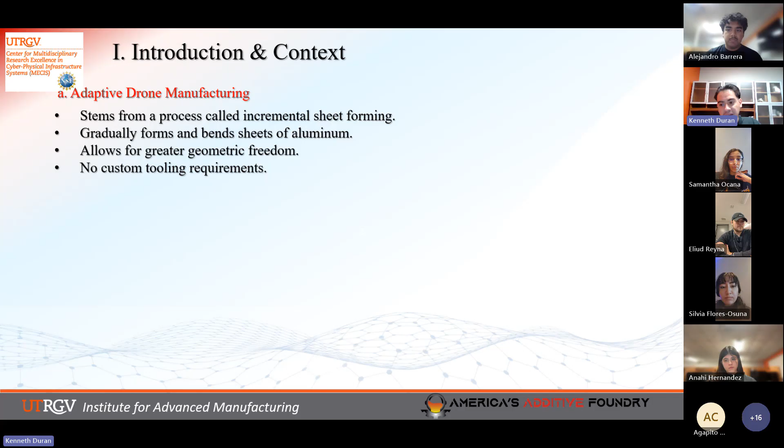So the problem statement. The problem that this research project is attempting to address is adaptive drone manufacturing. This process that I'm working on stems from a process called incremental sheet forming, which uses robotics to incrementally form sheets of metal, specifically aluminum, and now they're starting to work towards titanium. This process allows for a greater degree of geometric freedom, and it removes a great need of custom tooling requirements from the metal forming process.

This process is classified as a disruptive manufacturing technology. It aims to use artificial intelligence, adaptive manufacturing, robotics, and simulations to guide the process and disrupt the current manufacturing paradigm. It aims to do that by allowing for greater flexibility of parts, as well as allowing a manufacturer to manufacture custom parts on demand without the need for the design of tooling. Combining this new method with technology such as additive manufacturing will allow for greater possibilities.

Now on to the state-of-the-art processes that this draws inspiration from. The main process is called roboforming or incremental sheet forming. There are a couple different types. One method uses a single point, called single point incremental sheet forming, shown there on the left. You can use just a robot with a tool. Some manufacturers might have a sort of die or supports that they can adjust the height of to allow this tool to press against and generate the shape of the part they want.

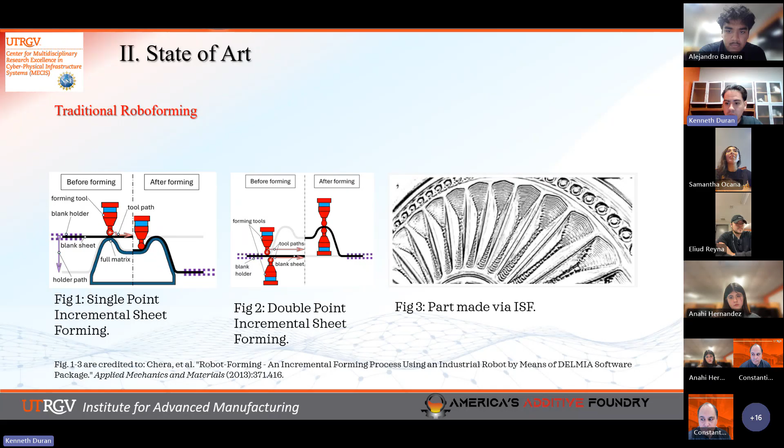The more advanced form of this is double point incremental forming, which is in the middle. Instead of having supports or some kind of a plastic insert, they'll just have two robots, one from each side of the material. One kind of pushes up as a support, and then the other acts as the workpiece. On the right-hand side, there's a close-up view of a part made by this process. You can see there's a lot of layer lines, almost like 3D printing. This part will incrementally form a part sort of like 3D printing, except it's plastically deforming the material millimeter by millimeter, one little layer at a time, giving it that rough look.

There are some limitations with these prior approaches. The first being that they are very slow - it can take hours upon hours to make a small part. They require massive robotics, very complex path planning, controls and sensors. A lot of these sensors and control systems are proprietary, and the tool coatings on the tooling used, even though minimal, are also proprietary. These parts produced tend to have very rough surface finishes and great dimensional inaccuracies. So to compensate for these inaccuracies and surface finishes, they routinely manufacture an oversized part and then cut out the desired size and finish it as needed.

The benefits to this process, as mentioned before, are the toolless manufacturing. So even though this is a bit slower, for small cycle productions, if I need something like maybe 100 parts, it might be financially beneficial to go this route instead of manufacturing custom tooling like a die or mold, which is very expensive and might take months to design and trial and error until it gets right, making certain parts prohibitively expensive to make via traditional processes.

Now, the methodology for my research project is a combination of robotics and off-the-shelf components. One key thing we aimed to do was reduce the need for custom tooling, so all of the robots and materials you can buy are common - nothing is really custom manufactured. I'm making use of an ABB IRB 6700 industrial robot, using a Loadstar pancake sensor, some aluminum extrusions, conveyor rollers, and common hardware. With the exception of the robot, everything I am currently using can be purchased off of websites like McMaster-Carr and used to construct this cell.

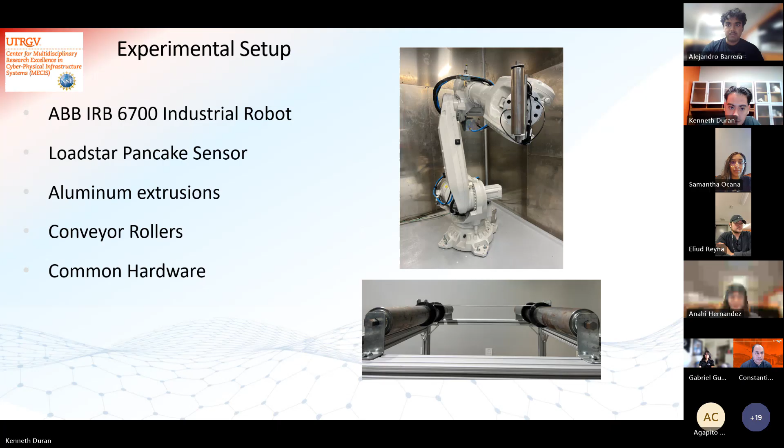Now, for our simulation setup, we're doing a simple geometry that replicates the support rollers, the sheet of metal, and then the load roller that's fixed to the robot. The LX represents the sheet metal length, LY is the thickness of the sheet metal, LZ is the width of the sheet metal, DC is the diameter of the load roller, which is on top and will be supplying the force to deform the sheet metal.

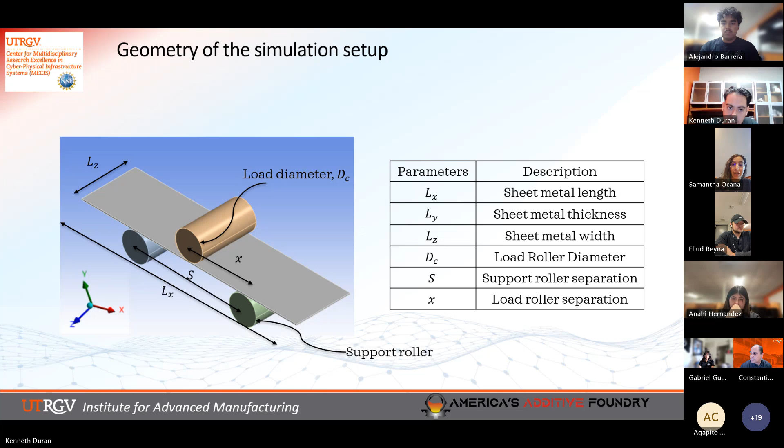S is the separation between the support rollers, and then X is the separation between the load roller and one of the support rollers. And these are the material properties. So I will be using 6061 T6 aluminum alloys, since that's very common in use for components and aerospace. Since this is for drone applications, again, I want to use common materials.

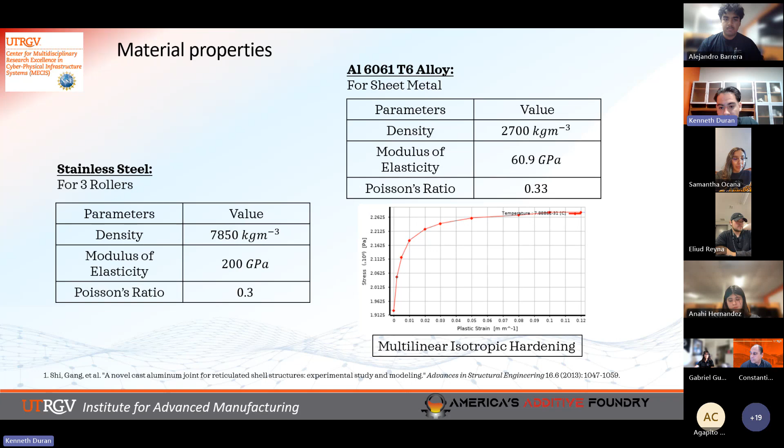I stuck with that. And then these are the properties for the stainless steel rollers I am implementing. It has to be much harder than the aluminum in order to plastically deform the aluminum without being damaged. On the bottom right is the isotropic hardening curve that I am using in ANSYS to base the deformation simulations off of. Now our applications and results.

So here I am showing simple 3-point bending, and I'm using a simulation of ANSYS, and it's going down and plastically deforming it up to 35 millimeters. And what we're showing here is the steps in this process, showing how there is some elastic recovery inside of the material. In metal forming, this is known as spring back. On the right-hand side, you'll see a mapping of the displacement for each step, and then you'll see the 3 steps on the right where it finishes its elastic recovery and stays stable in the relaxed position.

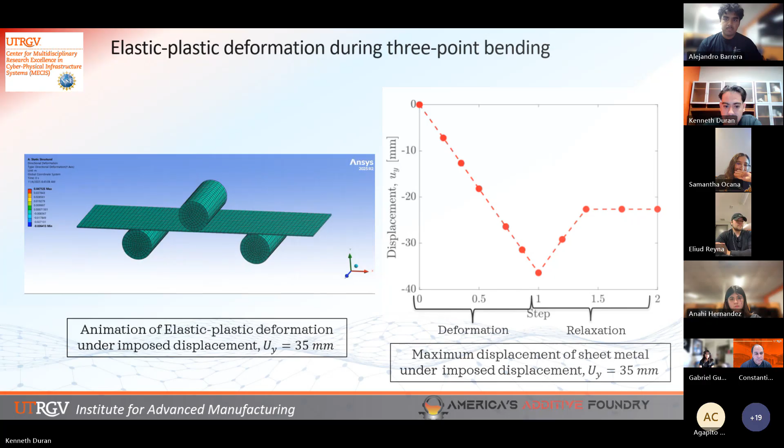Now, one thing that we would like to do in this study is leverage the use of AI. So implement some of these simulations and models to train an algorithm to help us predict metal spring back so that we can predict the pathing needed to create a final part. So here, spring back compensation is defined as delta Y. That's the difference between the displacement, the capital UY, and the relaxed displacement. So the capital UY is the displacement when this is under a load. That is when the roller is pushing down. When the roller returns, removes the load, it goes back to the relaxed configuration.

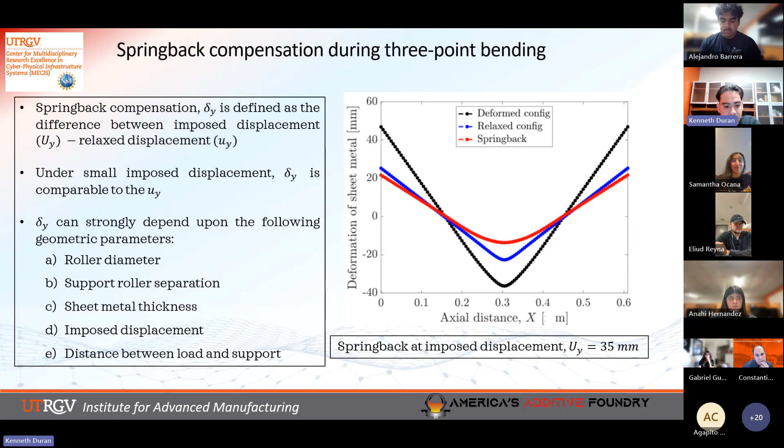On the right side, you'll see the black is a deformed, the blue is the relaxed, and then that red is the spring back. So that's the amount of elastic recovery that happens once the load is removed. And that is important in forming a part, because if I want a part to be in the shape of that blue line, I have to overbend it. So the goal of this is to use this as a baseline to train a model to tell us how much to overbend to reach the required geometry that we would like. Now, what we're finding is that this spring back can vary greatly depending on the roller diameter, the support roller separation, the thickness of our sheet metal, imposed displacements, as well as the distance between the loads and the supports.

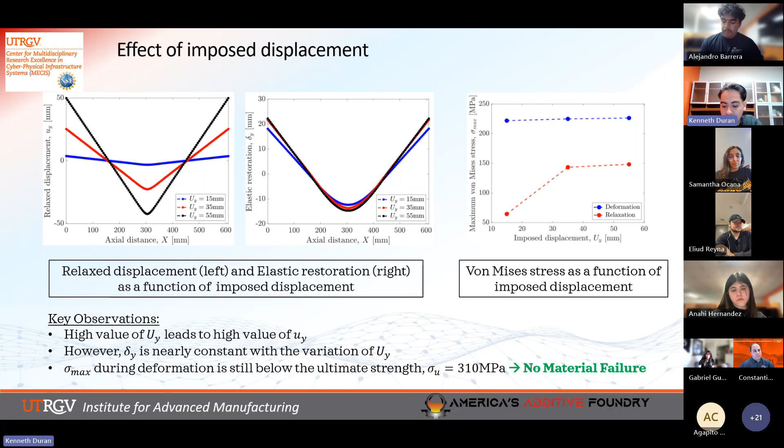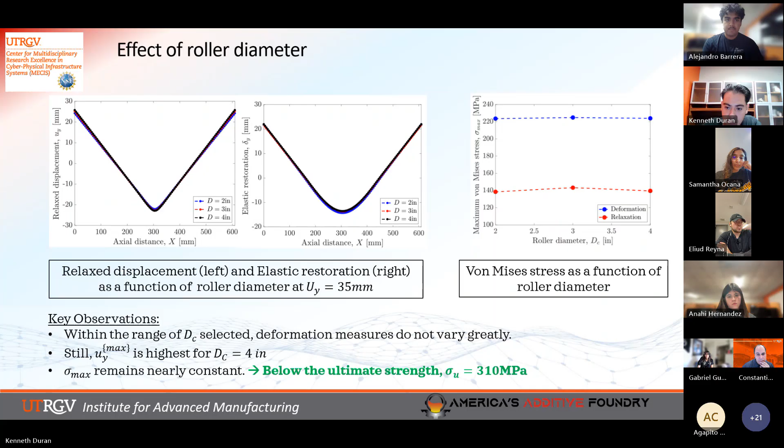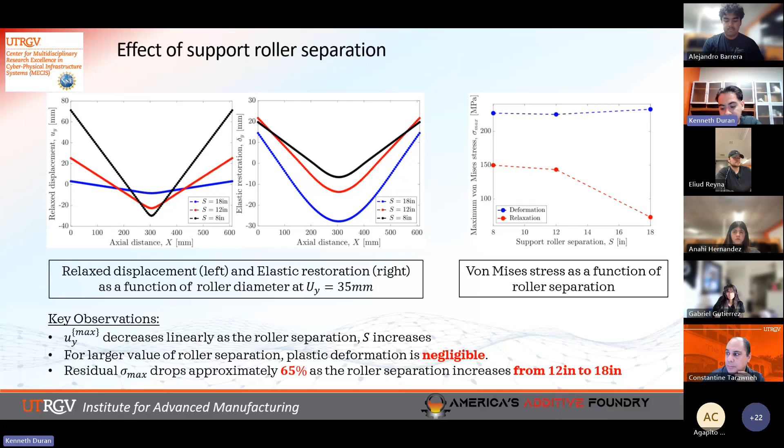Now, the maximum stress drops approximately 65% as the roller separation increases from 12 inches to 18 inches, meaning that the closer these rollers are, the greater this stress that the actual material experiences, leading to more plastic deformation.

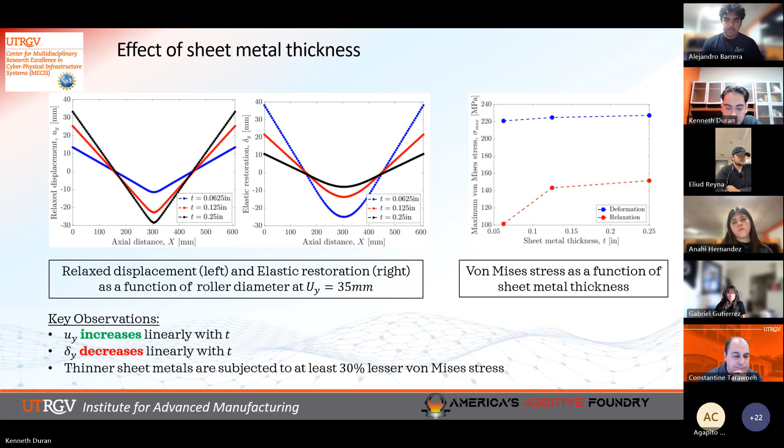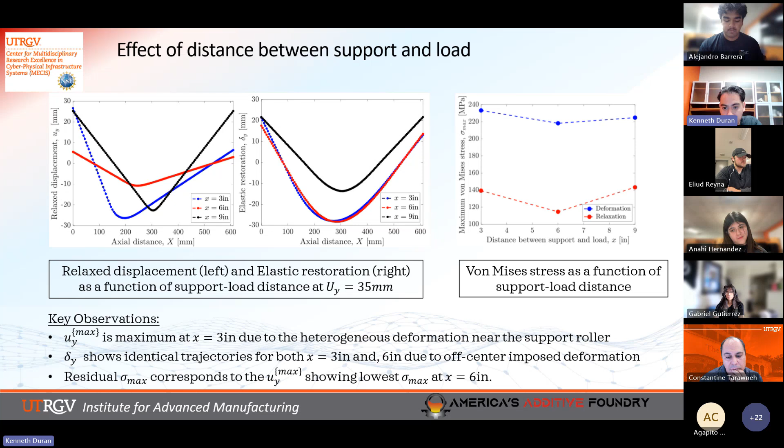The residual stress, again, here was actually lowest at X equals 6 inches, meaning 6 inches away from this support is where it was lower. Right next to it, it experienced a much greater stress.

Another thing that I've been looking into is the effects of repeated loading, meaning that if I have a displacement of 0, 45 millimeters, 50, 60, what happens if I displace it a small degree, remove the force, displace it more, remove it, and keep displacing it?

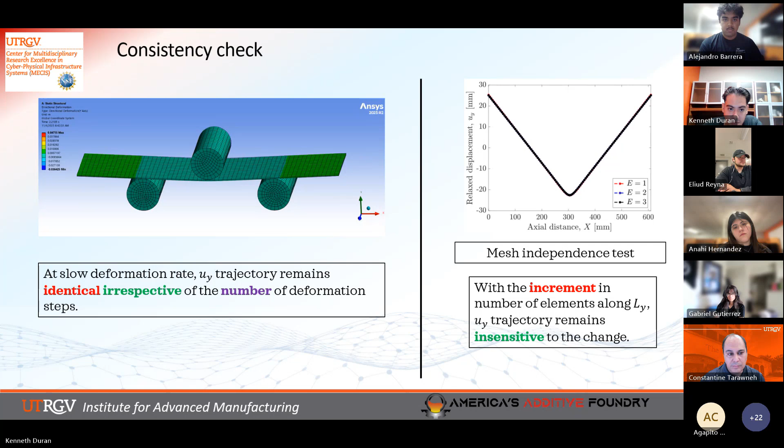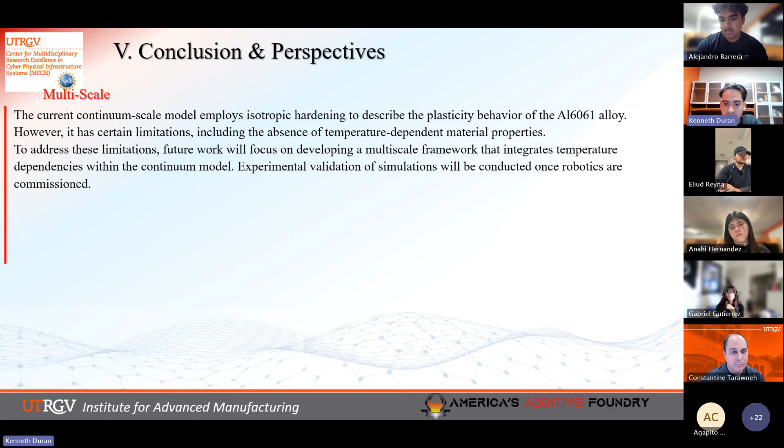I also need to complete experimental validation of these simulations once the robotics in the lab that I am using have been officially commissioned to actually go and verify that real life matches these simulations. If there's an issue or discrepancy, we can go back and forth between them until these problems have been addressed. And that concludes my presentation.

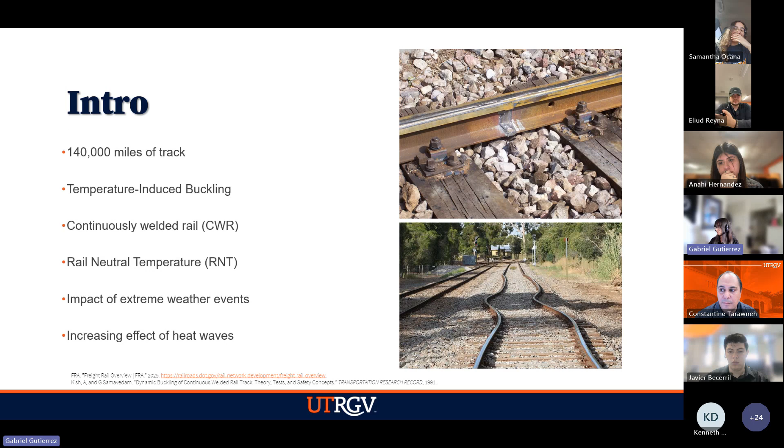So how we figure out if a rail will buckle is we take the rail neutral temperature, which is basically just the temperature that the rail is considered the most stable, and we will try to investigate when or what the risk of buckling might be. The reason this is important is because with the changing climate, there's a lot more probability of heat waves, and they are also getting a lot stronger. All sorts of weather events can happen at any time, and they just get worse and worse. So there's a need to investigate the risk of these rails.

So the problem statement and the knowledge gap. Currently, most research is focused on finite element analysis and lab experiments. So basically, they're working with the rail on a small scale, usually in a lab, to try and figure out the point of buckling for the rail. This is fine, but in a real world scenario, there's a lot more factors at play that can affect the rail. Something else that has been worked on is people trying to use machine learning to try and predict the type of accidents in the rail.

What they'll do is they'll usually take accident data that currently exists, plug it into a machine learning model, and try and figure out what type of accident was caused. Because of this, there's a need for an analysis on a network scale or a holistic scale, basically taking in the entire network and all sorts of weather at any given points, not just in a lab.

So our goal, as I said, is to investigate the vulnerability of the rail network on a large scale against extreme weather events using graph theory and risk assessment.

So the methodology, basically, is a very simple process. We take the rail data, weather data, and county data, and I'll explain more about this in a little bit. We will try and create a weather-informed rail graph. With this, we will try and calculate the probability and the impact. The probability is just the likelihood of failure. The impact is how important a rail is in its position. And with this, we will try and calculate the severity of the rail.

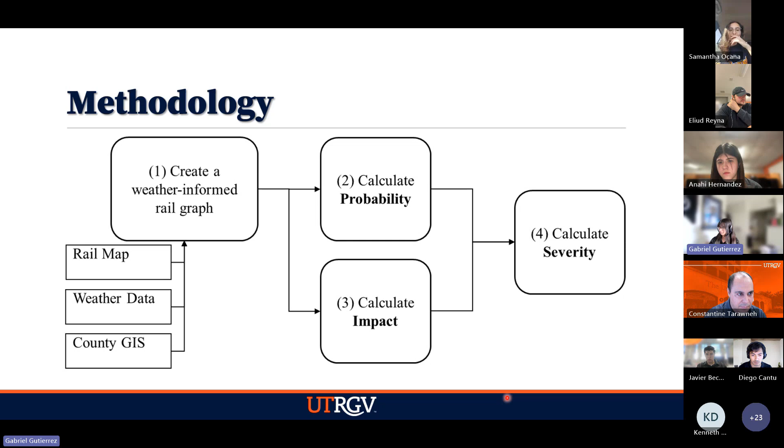So these are the three sources of data that we got. We took data from the Federal Railroad Administration. There were about 328,000 rail edges before cleaning. We also took data from the NOAA. This is all just weather data. It is monthly data that has been collected since 1896. So a little over 100 years' worth of data to feed into our application.

And finally, we took some data from the census. This is county data used to put together the previous two data sets, because the numbers within them don't agree with each other when it comes to what is defined as a county.

So this is the US rail network. This is all of it before having done any cleaning. You can see here there's a lot of little spots that are in the middle of nowhere. They're not really connected to anything. All of this needs to be cleaned out. So what we did is we just took all the data that was considered main network, and we only use those points. All of these other little branches just disappear after that.

We are currently exploring this as a case study. So we're taking four major dates. We're taking 1936 as the hottest month, and this is actually a historically bad heat wave. You can look it up. There were a bunch of disasters. A lot of people got injured and/or died from heat exhaustion. We're also taking last year in the summer. This was also another historically bad heat wave, the worst we've had in a long time. There is a possibility that this year could have been hotter, but at the time that we took this data, we weren't there yet. So we haven't actually analyzed this year.

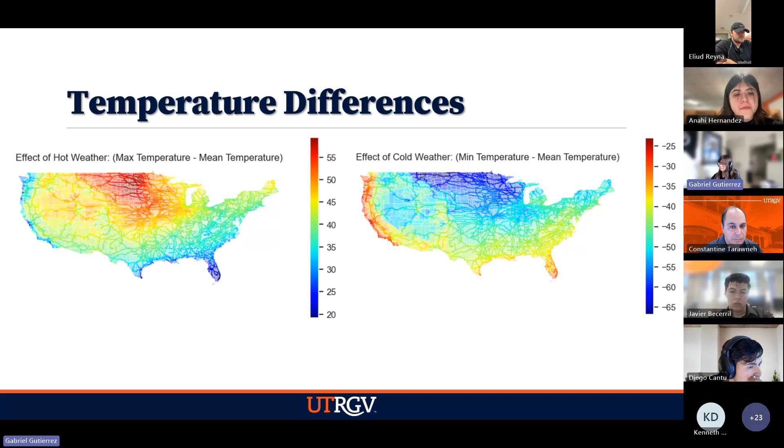Generally, these other areas of the United States are not as big of an issue, but they still can run into problems of a high difference in temperature. This is basically what our formula returned. Like I said, this general area is very high risk of failure, just because of how temperate they are.

And this is against the hot days, and then here is the cold days. Like I said, temperate areas are more likely to fail. This doesn't mean that these other areas aren't at risk of failure, it just means that they have a much lower probability compared to these areas.

Any critical rails that we found, using just these paths, we only really found these areas, the paths from Brownsville going up to San Antonio. Excuse me. Since these rails are critical, that means this is the only existing path from here up to the rest of the network.

And if any of these rails were to go down, then any trains that are currently here or trying to get into here would not have a path to progress. This could potentially disrupt a supply chain, or just generally delay any sort of goods that are coming in.

The impacts, so this is after we had run our algorithm. You'll notice down here, there's a huge lack of alternate paths, especially here in New Mexico and Arizona. This having a high impact basically just means that if these rails were to go down, then a train would have to reroute, and it would take a very long time for them to actually reach their destination. So it's very costly for time. There's also a high impact area up here in Seattle.

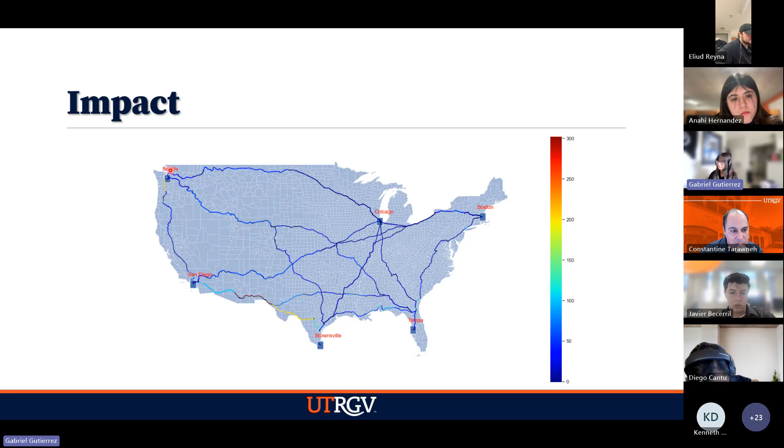And then finally, our severity. Up here in the Pacific Northwest, in the Midwest, there's a very high severity. Since these areas are very likely to fail just based on their temperature, they kind of have a higher tendency to have a higher severity.

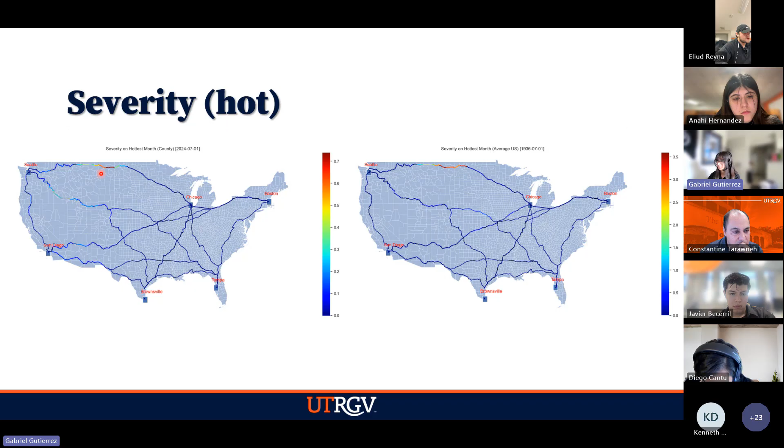Especially in this area, there's not a lot of alternate paths. Generally, there's not a lot of alternate paths going from the west side of the US to the middle. So it kind of results in this. And I'll zoom in on these maps so you can see them a little better.

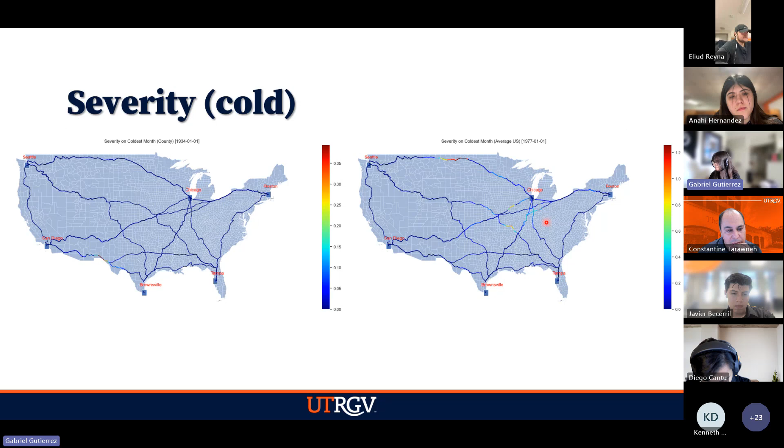And then during the cold days, still in the Pacific Northwest, there's a high severity. There's also a very high severity in this general area, Illinois, around there. These areas do get very cold, and as such, they're likely to crack, which is basically just the rail gets too cold and it'll pull itself apart. And here's the map zoomed in again.

So our conclusion: what we have found is that some areas of the network are particularly vulnerable, especially the Midwest and the South. A high difference in temperatures increases the probability of failure. Having many alternate paths will reduce the impact of rails, and severity analysis is very important for planning the future of the network.

This sort of decision tool can be given to a decision maker to help plan out what areas need maintenance, what areas could use a new path. Typically, if you did not know the current state of the network, but if you were to plug in, say, the next few days, you could try and figure out if there is a probability for something to happen over the next few days.

Some future work that we want to do: we want to add other weather events. Ideally, we would add things like flooding and storms. We would also like to improve the probability function. Currently, we only tried out a normal distribution, and we're wondering if there are other formulas that can do better than this.

We also want to add in some other factors. Currently, we just have temperature, but like I mentioned at the beginning, there are a lot of factors such as humidity, exposed sunlight, shading, etc.

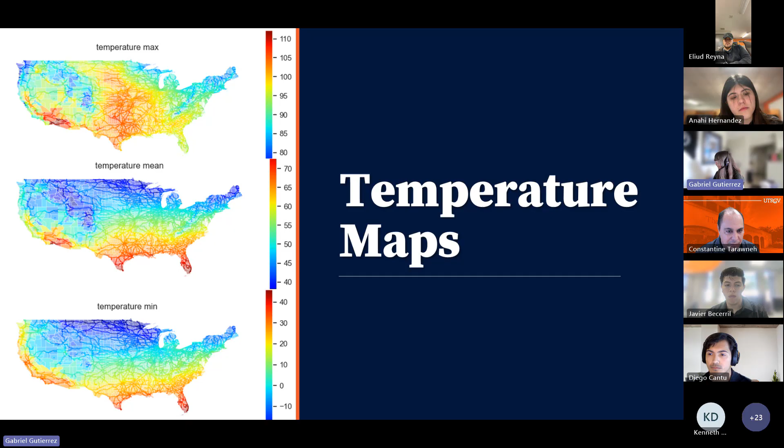So the neutral temperature, currently we are just assuming it as the average temperature. So essentially it would be this map here. In reality, the real neutral temperature is usually around maybe 80 or 90 degrees. I believe when people lay down rails, they choose to do them on days that are particularly hot, so that whenever it gets too hot, their neutral temperature is already adjusted to this. But data like this isn't really publicly available, so we kind of just have to make the assumption that it will be the average temperature in that region.

And we're using it with this formula here. So we take the neutral temperature and then we do a bit of math to it as a normal distribution. So I imagine the neutral temperature changes monthly or seasonally. Are you guys taking that into account?

This is just an example distribution, for one day at one time. This model can actually account for any day at any time. Essentially, Diego, the real neutral temperature does not change.

The real neutral temperature, when you lay down a rail, is basically based on people studying the weather in that area, right? And they pick an RNT that they feel is the most appropriate. So not every area has the same. It's a lot of it based on understanding your network, your rail, and the weather. Now sometimes you can have extreme weather conditions where, even though you lay it right, like in the Midwest, you can have huge variations. One day it could be -20 and the other day 60, so you can have huge swings. But again, it's not that the RNT changes, it's how you set your rail.

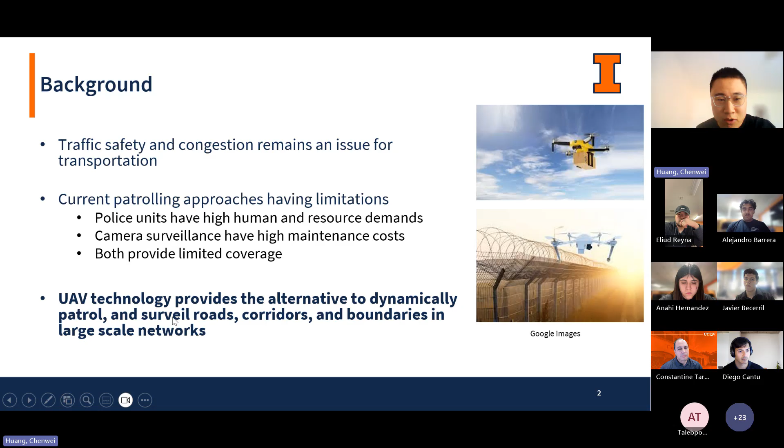Most of the current UAV patrolling work have formulated the problem using a node-based formulation. However, much of the work here does not consider arc-based formulation, which aims to cover edges of the network, which may be more applicable for UAV patrolling applications.

Most of the current arc routing work is widely applied in applications such as mail delivery, garbage collection, and road maintenance. However, as I just mentioned, a lack of attention is given to modeling the patrolling problem as an arc routing problem, specifically as a K-Chinese Postman problem.

Just to introduce the problem, the K-Chinese Postman problem is a variant of the traditional Chinese Postman problem. Here, the K-Chinese Postman problem introduces a constraint that we must generate K sets of least cost walks such that all the edges in the network are covered at least once. And because we have this specification on the K walks, this problem is NP hard for situations where K is greater than 1.

Just to give some brief introduction on the existing methods to solve the problem: one method proposed in this work proposed the exact method. However, in their method, they only found the results to be solvable for small-scale instance graphs, but cannot generalize to larger graphs. As a result, because of the scalability issue, most of the works have proposed heuristic approximations to solve the problem. Notably, these two works.

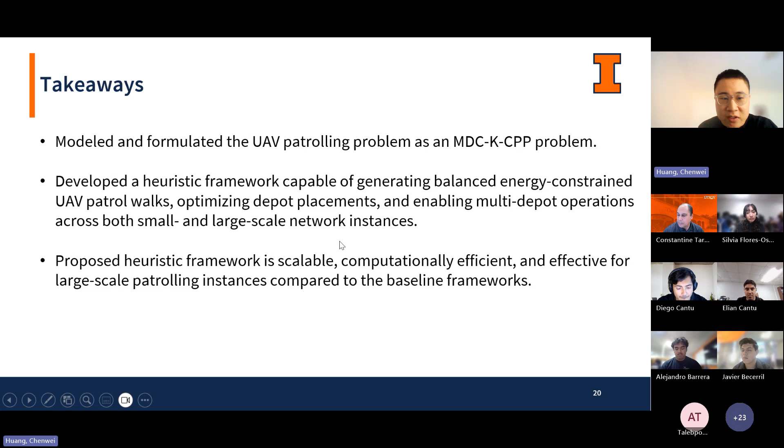So, just to conclude, what are our 3 takeaways from this study? First, we have modeled and formulated the UAV patrolling problem, considering 2 of the limitations that were mentioned earlier, and we formulate this as a multi-depot capacitated K-Chinese Postman problem. Secondly, to address the computational complexity and NP-hard nature of the problem, we developed a heuristic framework capable of conducting these sets of tasks. From our findings, the framework is both scalable and computationally efficient for large-scale patrolling instances.

Despite this, there are still future considerations that can further improve our study. Specifically, the first thing we can do is to incorporate different takeoff and landing points or depots associated with the UAV walks into our problem framework and heuristic framework. Secondly, we can also extend our framework to accommodate real-time updates and dynamic network conditions, for example, where edge priorities may shift due to changing obstacles or threats, or where energy consumption may change due to environmental factors.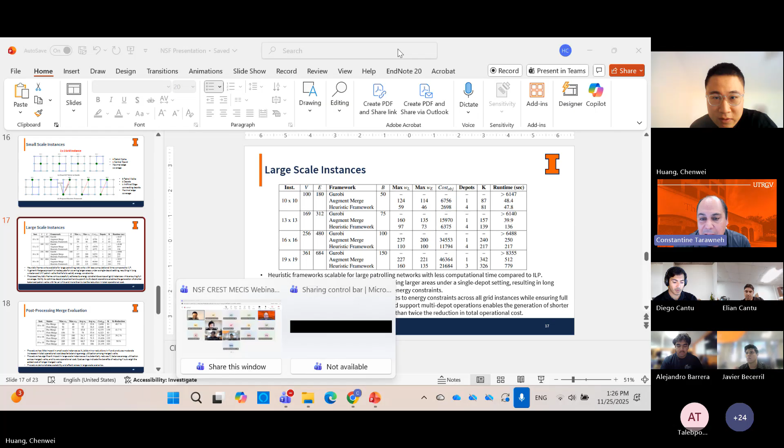Well, thank you, Chenwei, for your presentation. As I said, you might want to keep the conversation going, and maybe you and Dr. Talebpour can work with Javier and Luki, because Dr. Luki has a lot of robots and ground robots in his lab, and you might want to work together. It's very nice if we can have some joint work and joint publications. That would look very good for all of us. So please, if you need to set up a time to talk, that would be a good way to do this. That's right. My student, Jose, works on task allocation for multiple robot systems, very similar to your work. Thank you. Excellent.

Okay, so with that, I want to thank Chenwei again, and we're going on to our fourth and last presentation. The student Mario Camarena, a master's student under the supervision of Dr. Fatemeh Nazari and Dr. Nurzulai, will be presenting. The title is AD-SAM, Fine-Tuning the Segment Anything Vision Foundation Model for Autonomous Driving Perception. Mario, the floor is yours. Okay, great. Can you hear me? Yes, you're good to go.